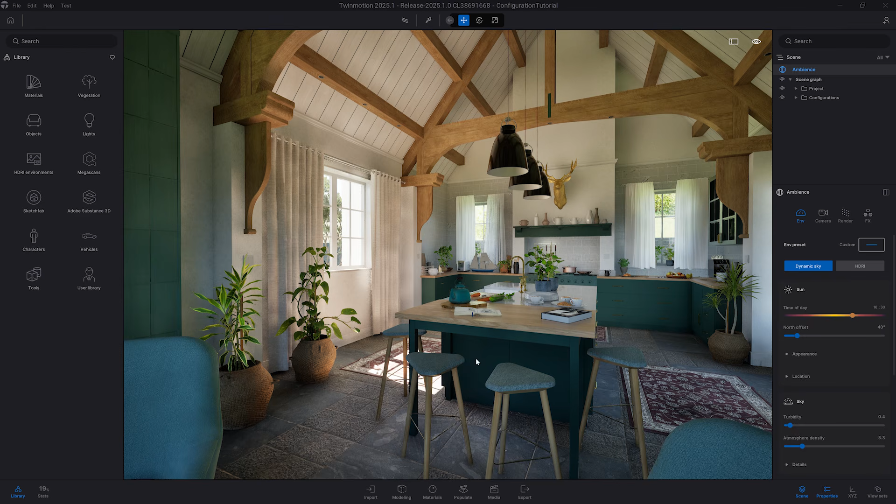This new type of media can be found by going in the media dock and heading over to the list icon in that bar. The first thing you will need to do is select the type of configuration you want to create. So I'll click on the three dot button here and it asks me what I want to create. Let's start simple and create a material switch configuration.

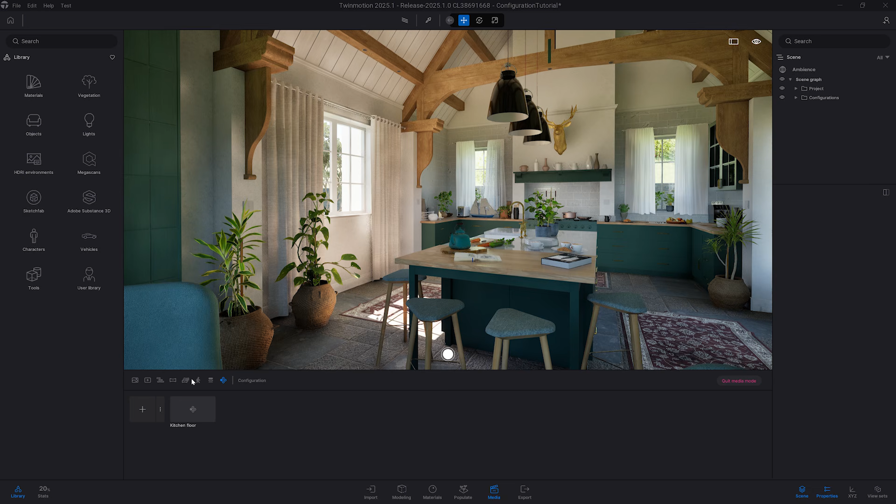I'll click on the plus to create my first configuration, which contains by default a first state. I can head back to the list of configurations by clicking on that icon, and here I can see the first configuration I've already created. I'm just going to rename that kitchen floor, because that's the first configuration I want to create with you: change the set of material applied on that kitchen flooring.

Let's select back our configuration here. Right now I have a first state that memorizes nothing. What I need to do is make a change in my scene based on the configuration I have created, and click here to create a second state.

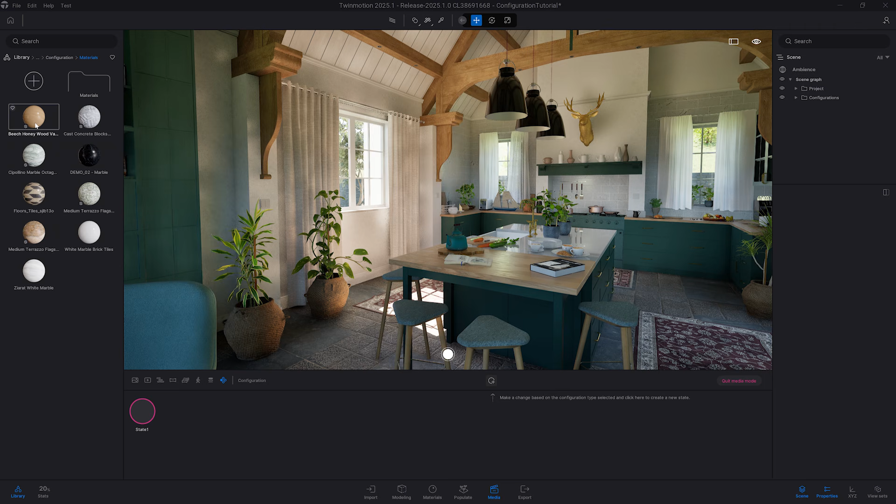So let's do that. I will head over to my user library where I've set up a few materials for this tutorial. I'm going to use this floor tile here and drag and drop that on my kitchen floor. Now what I'm going to do next is simply click on that create new state button. This will create a state number 2 that memorizes that material on that mesh in my kitchen.

So I'm going to drag and drop this one and this one. So now I have four different materials applied to my kitchen floor.

I can select them by clicking on each thumbnail, but you may have noticed that at the bottom of the viewport there is a trigger icon over here. When you click on it, it will switch from state to state. You may hear a small sound when you are hovering the trigger and when you are clicking on it.

If that disturbs you, you can go to the Preference panel by clicking Ctrl P, Appearance, and disable all sound by unchecking this option.

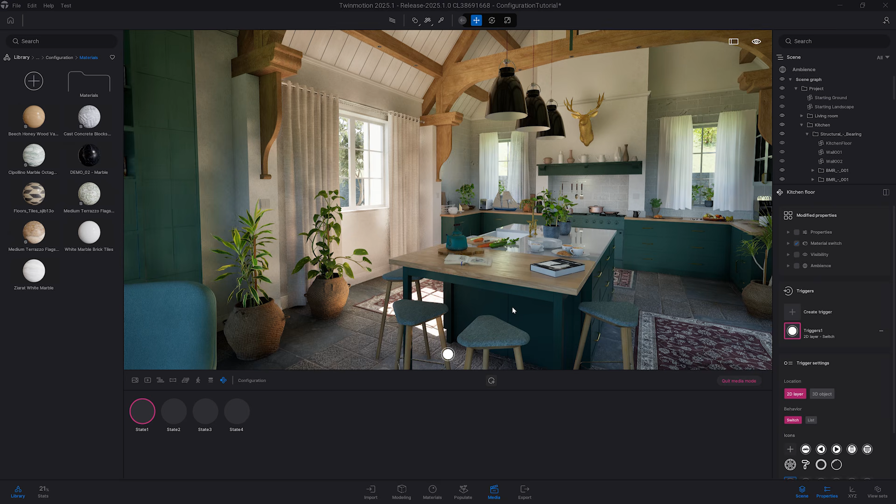So now let's head over to the Property panel of our configuration to see what we can do with our trigger. At the top here you have the list of modified properties within your configuration. So we have created a material switch configuration, and if I expand that, I can see that I've modified the material applied on the kitchen floor geometry.

Here I have the trigger. The trigger is the interactive button that will allow me to switch through the list of states I have created. And here I have all the settings related to that specific trigger.

First thing I want to change is the trigger icon. Here there are a few icons that are natively present inside Twinmotion. So let's say I want to use that color palette because we are changing the material applied to that floor. The next thing I can do here is change, for example, the opacity of the trigger, the color, or the size. I like to leave everything by default here.

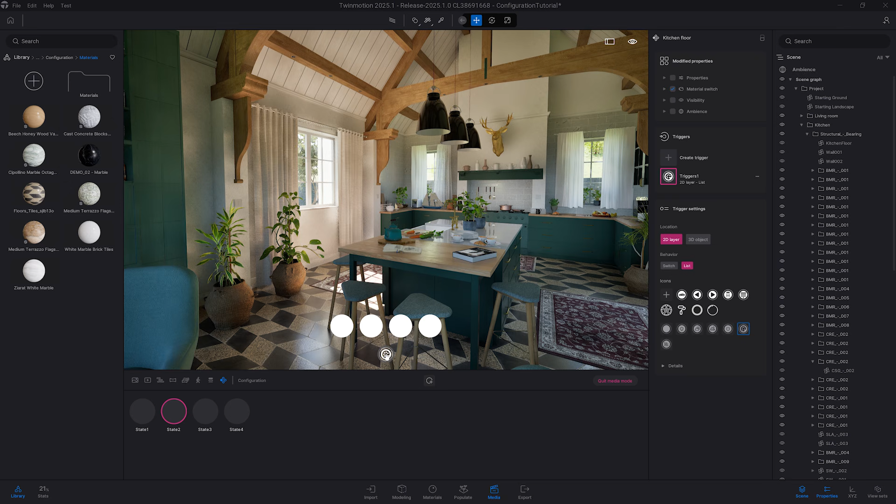What I can do now is switch to a list. That means that when I click on that button, it will open a list from where I can precisely choose the state I want to use. But right now that list is empty, it only has those white thumbnails. That's because I need to load or create my own thumbnail.

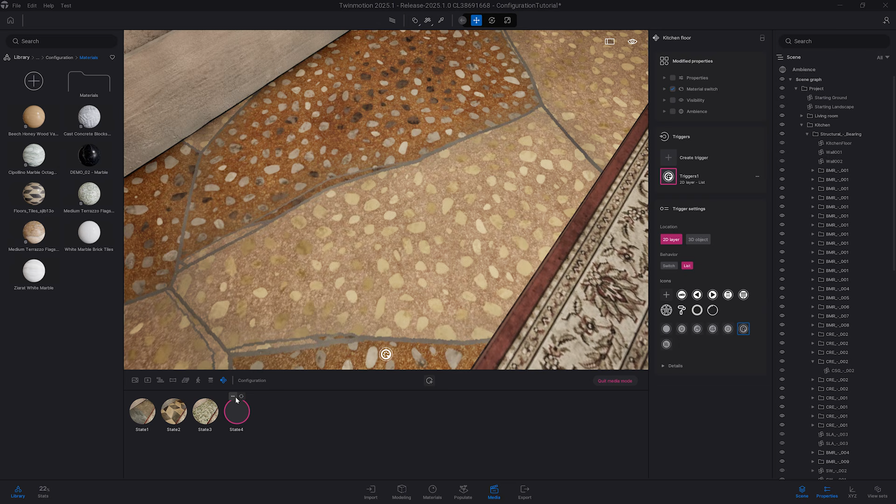So let's go over to an area where I can see my material well, like that. I will click on my first state, click on the 3 dot button, and click on Capture Thumbnail. This will capture a thumbnail directly from the viewport. I'm going to do that a couple of times for each of my states. So now I have a nice thumbnail.

Let's head back so we can see the whole scene. And now when I click on my trigger, it opens a list of thumbnails and I can precisely choose the material I want on my floor.

Bear in mind that this refresh button doesn't recapture the thumbnail automatically. It will refresh the change you are doing in the scene, and I'll talk about that in a future configuration we'll create together.

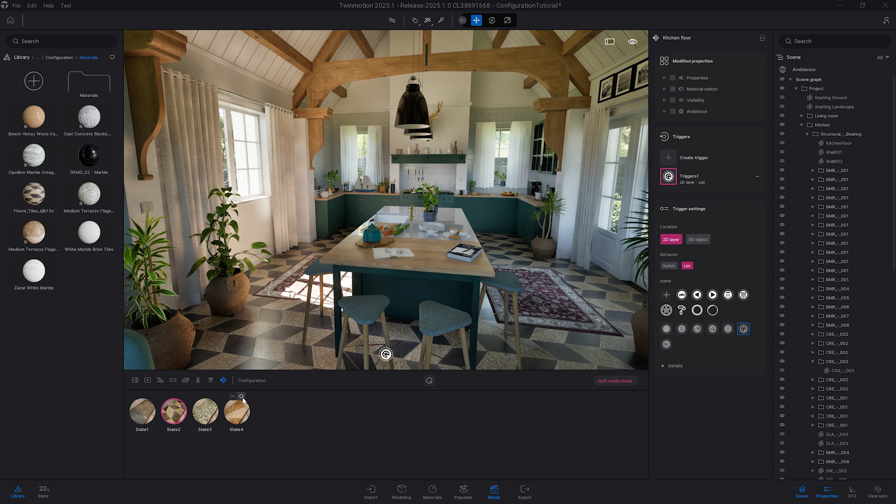So let's say we're good to go on this first configuration. Let's now create a second one. I want to create a visibility configuration. You can multi-check multiple types, but in most cases you'll create a single type. Here I want visibility, so I'll check visibility and click plus. To keep things organized, I'll rename it to stools.

Select back my configuration, here I have a few stools. Let me come to my scene graph and open my configuration folder, stool. Here I have 4 different folders, one for every stool design in my scene. So what I'll do is hide my first folder, unhide the second one, clicking on create state, and do that for all my stools.

So now I have 4 states, one for every stool. I can use this same technique to capture a thumbnail of each, but what I did instead is place those different stools in a simple lighting scenario and create some images.

Now I can use load thumbnail to load a custom image from my disk. So here are my 4 different thumbnails I've created. I'll load the first one, click on the second one, load thumbnail, third one, and fourth one. So now I have 4 different thumbnails.

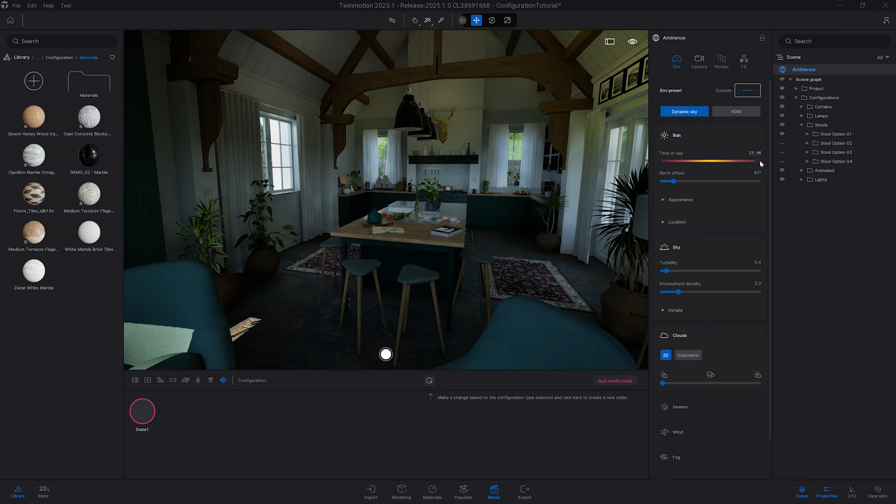That first state will be what we currently have in the scene, the daylight scene. But in a second state, I want to create just a night scene, so I'll change the time of day to something on the night, making it way darker, and click the plus button to create a new state.

So we start with state 1 during the day, state 2 during the night. If I expand this option, we can see I've only modified the time within that configuration. That list of modified properties is for your whole configuration.

Let's say I want to change something else. Maybe in that second state I want to change the north offset a bit, so we don't have the moonlight coming in that setting. I can just change that a bit.

Now I need to refresh those changes, because if I just click back on my state, it will apply that state, which just has a modification of the time of day. So as soon as I make a change, like changing turbidity, atmosphere, adding clouds, or changing the north offset, I'll need to click on the refresh button. Here I've modified a bit too much, so I'm going to click back on state 2 to get our default settings, then change just the north offset and click refresh.

So that's going to be my day and night configuration. For that I'm going to use this icon. What I want to do next is create a configuration where we can turn on and off some light in the scene.

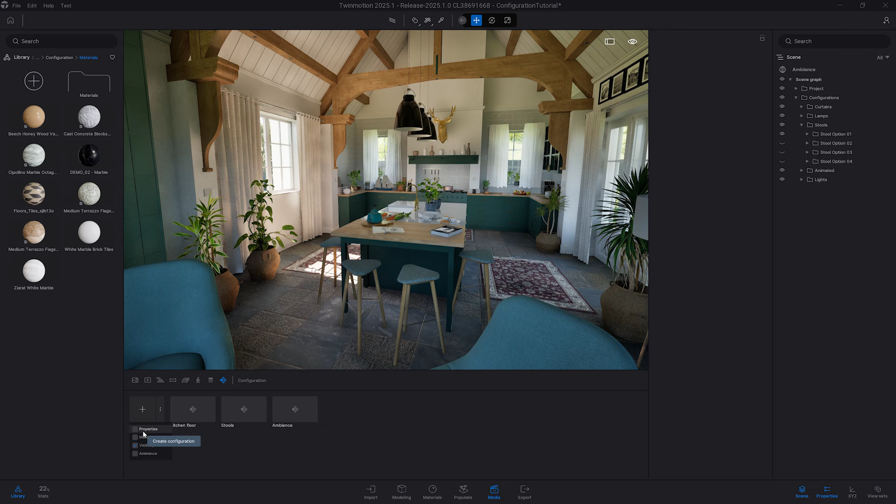So for that I'm going to play again with the visibility. It can be done in a couple of different ways, but for this first example I'll do it with a visibility configuration by clicking the plus button. Now what I want to turn on is the lights over my oven. I'm going to come to my light folder, kitchen light, and here we have a simple light that I'm going to turn on by clicking the plus button. So when I click on it, it will turn on this light.

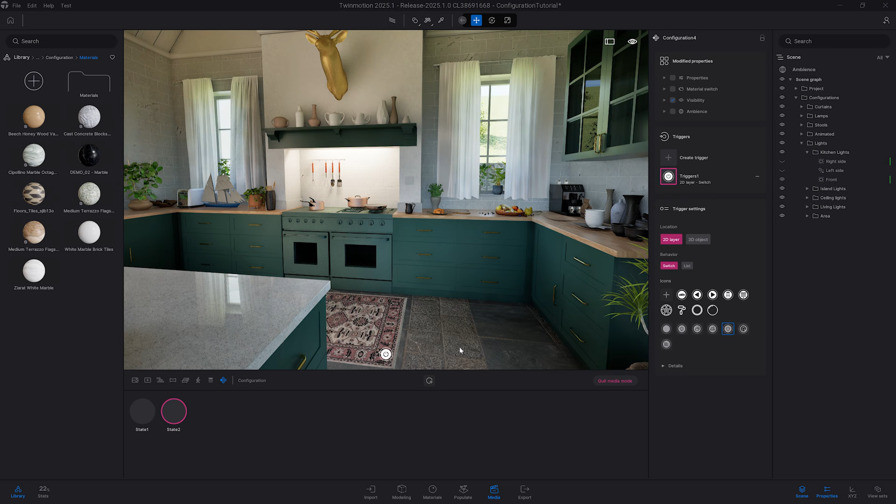For this specific light, what I want to use first is that on-off button. And now I want this icon not to be in 2D, not on the bottom of the screen — I want this icon to be in the 3D space. That's where the location option will be useful.

I'm going to click on 3D object. This will place a trigger in my scene graph that I can grab and move anywhere in my scene. To move it, I'll select it, press Shift and click on the geometry. This will align that trigger on the geometry I've placed my mouse against.

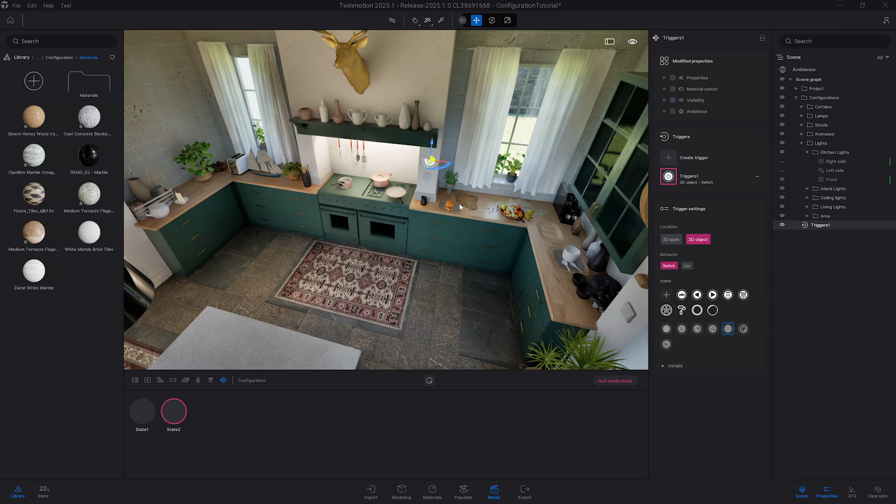But you can also simply move closer to it and use the gizmo to move it exactly where you want. In that scene I've placed a light switch next to where I wanted that light to be enabled, so I'm going to place the trigger just in front of that light.

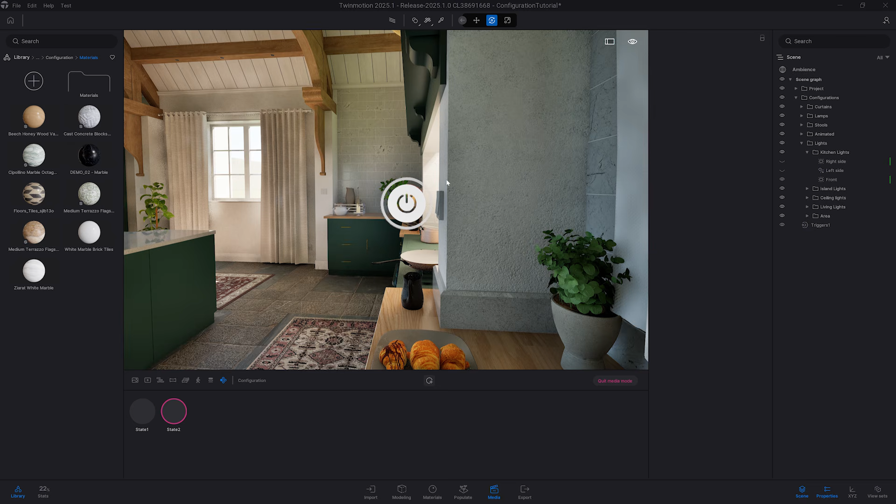By default, the 3D triggers are always facing the camera. So as you can see here, when I turn, it will face the camera. And in a lot of scenarios that works well. Personally, what I want in this specific scenario is to have that trigger always in a fixed position in the world.

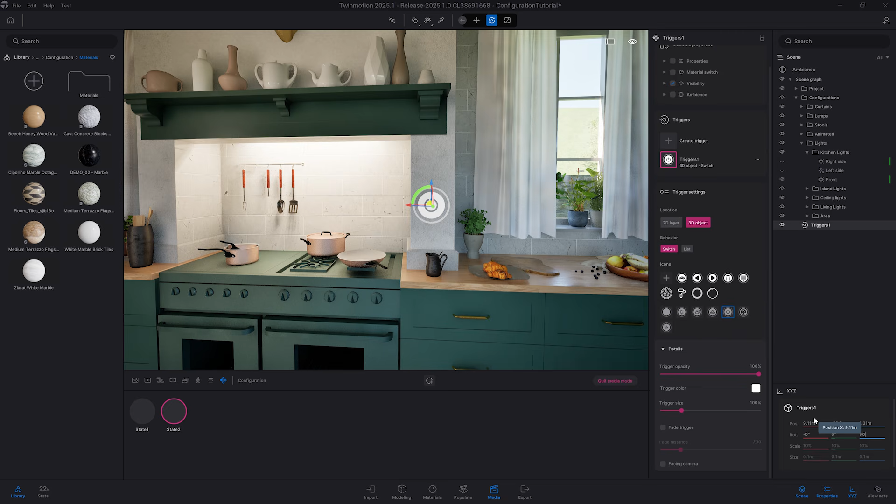So I'm going to come to the Details panel and uncheck the Facing Camera option. I'll select my trigger back, and when I open the XYZ option, I can precisely orient that trigger. Typically, I want to reset the rotation it has to 0, 0 and 90, so it's no longer facing myself, it's just aligned with the wall here.

And now I can also move it closer to that light switch. So now you may notice we don't see the light switch anymore, but we have something for that — what we call the fade trigger. When you check that option, the trigger will disappear and fade in as the mouse gets closer to it. So when my mouse gets closer to my trigger, it will appear and allow me to click on it to turn the light on and off.

When you are experienced and know your presentation well, you can actually make that trigger at 0% visibility, which will allow you to click and just turn on your light, switching from state 1 to state 2, without having any trigger visible on the scene. That gives you a very realistic scene without any visual helpers, but of course you need to be very precise and know well your presentation and where you've placed your different triggers.

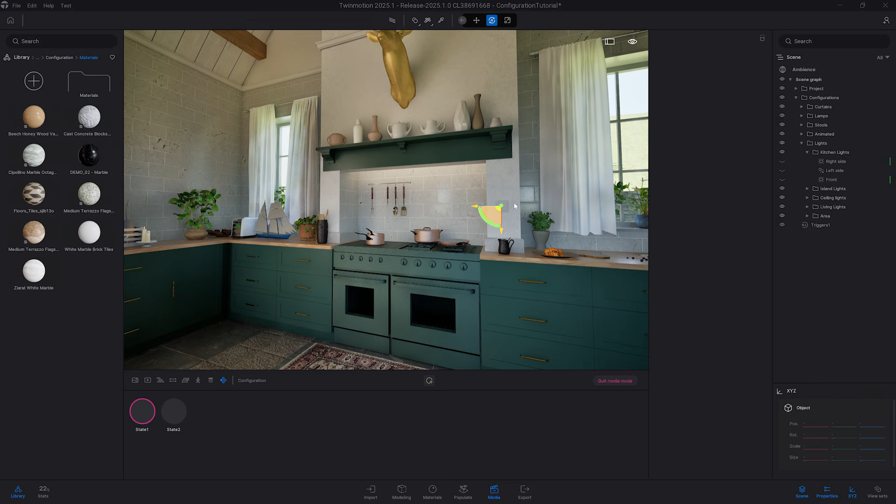When you are within the Twinmotion editor, where you have the toolbar and the dock everywhere, clicking on it will automatically select that trigger so you can move it around. But of course, when you are in full screen mode, clicking on it won't select the trigger — you'll just click on it and activate the different states.

Let's come back and review some of the things we just did. We configured materials, we did our stool design, and this one will switch to night mode.

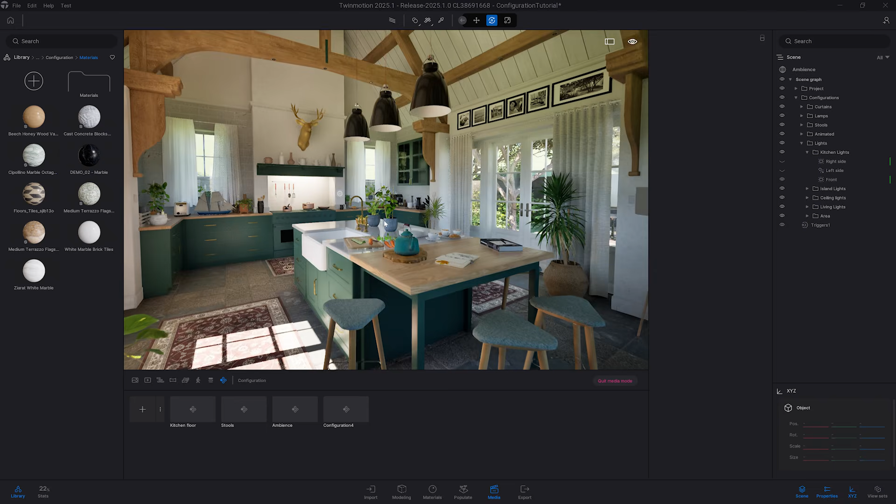Now we can turn on the lights. Let's exit that, and I'll create a new material switch configuration to show you how to fix an issue if you have a problem with your file.

I'm going to create a material switch, and what I want to change is the wooden countertop. I want to have a simple marble on my second state. So state 1 is wood, state 2 is marble.

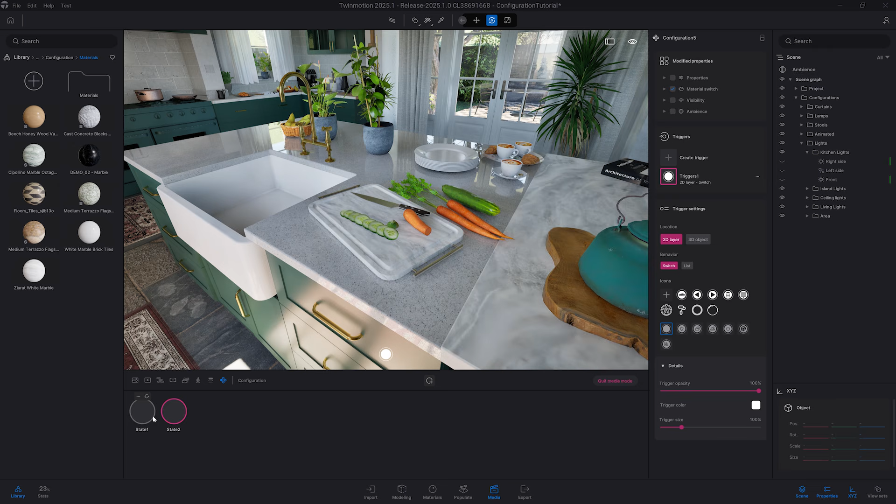The problem you may have noticed is that my cutting board had that same material. When I drag and drop a material from my library onto my mesh, it overrides all the previous mesh. The wood has been overridden by that new marble, and typically I don't want that on my cutting board.

To fix that, I'll come to my list of modified properties. Here I have my cutting board, which should stay in wood. So I simply need to remove the cutting board from my configuration by clicking on the bin icon. Now the cutting board is back to its default wooden material, while the other mesh still have that marble material on them.

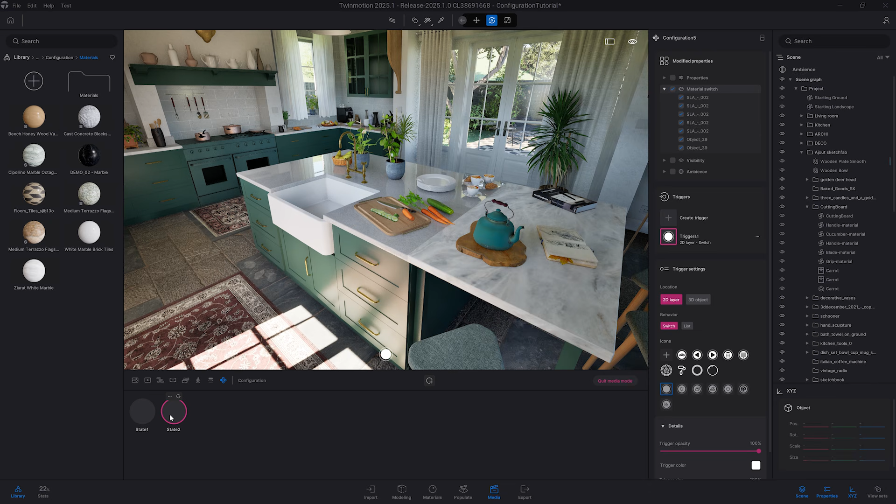So now I can safely switch from state 1 to state 2 and the cutting board is not affected.

The last type of configuration is the most versatile one: the configuration of properties. What we call properties is all the property panels in Twinmotion except the ambience. If you select ambience and want to change anything there, you need a configuration of ambience. But any other property panel can be tracked with the property type of configuration.

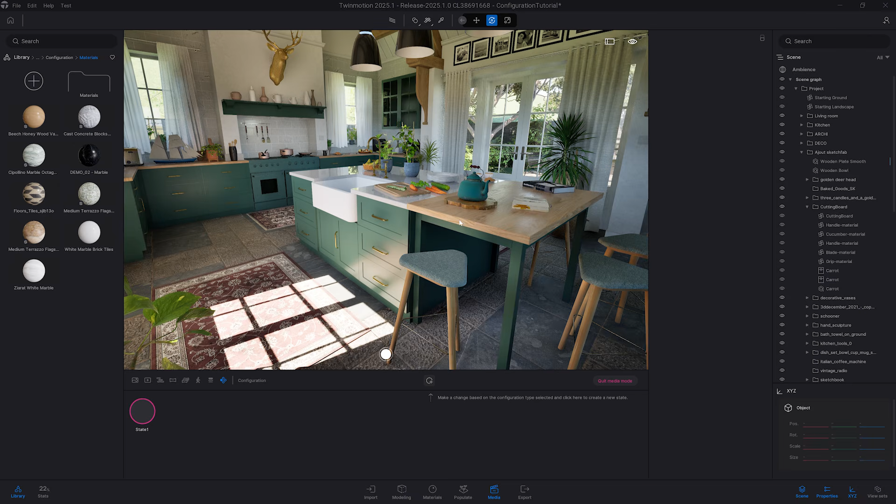Let's create a new configuration. I'm going to name it furniture, and what I want to change is simply the color of my furniture. The first state will be that green color.

Now I'm going to select my material picker, click on the furniture, and all the options in that property panel can be tracked in a configuration. I'm going to change the color to white, click OK, click plus to create a new state, and now I can switch from state 1 to state 2.

Let's create a third one. Selecting my material picker again, I'm going to create a dark, almost black color, then click plus. So here we just changed one material.

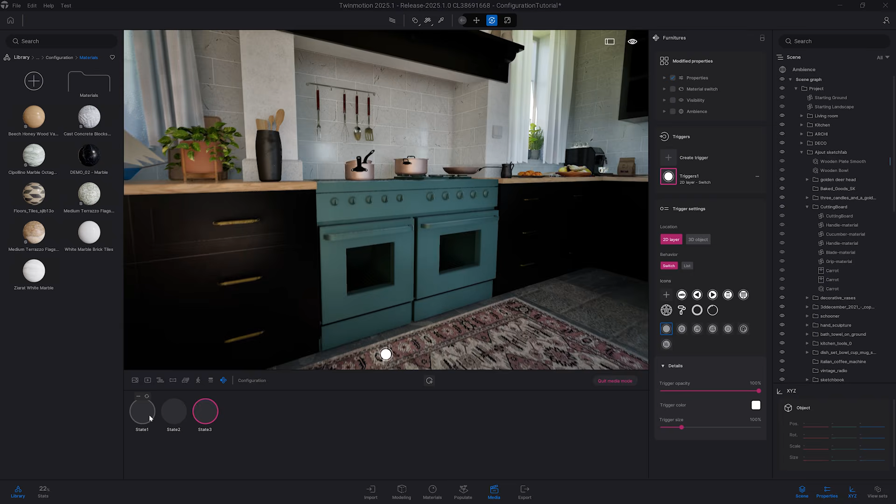What I want to change is also the oven. State 1 will remain green, that's fine. For state 2, I'll pick my material picker, select that material, and switch it to something gray. I'll click refresh to memorize that change on that existing state.

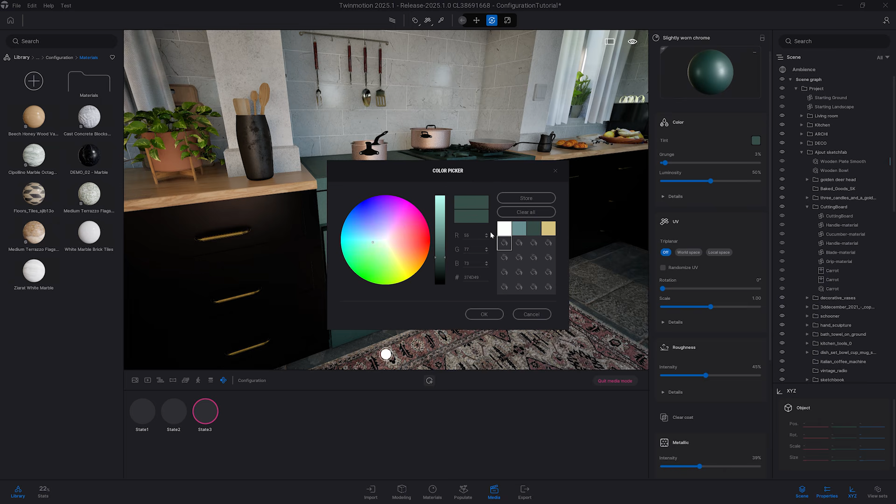Same thing on state 3 - by default it's green, so I'll select that and switch to a darker color, then press refresh. Now I've created a configuration of property where I changed only the color of two materials.

Another example of property configuration is for animators. Let's create a new configuration of properties. I'll press G on my keyboard to show all the visual helpers, then select my animator. I'll click play to play it, then click plus - this memorizes that in state 2 the play is on, while in state 1 the play is off. Now I can simply open my drawer like that.

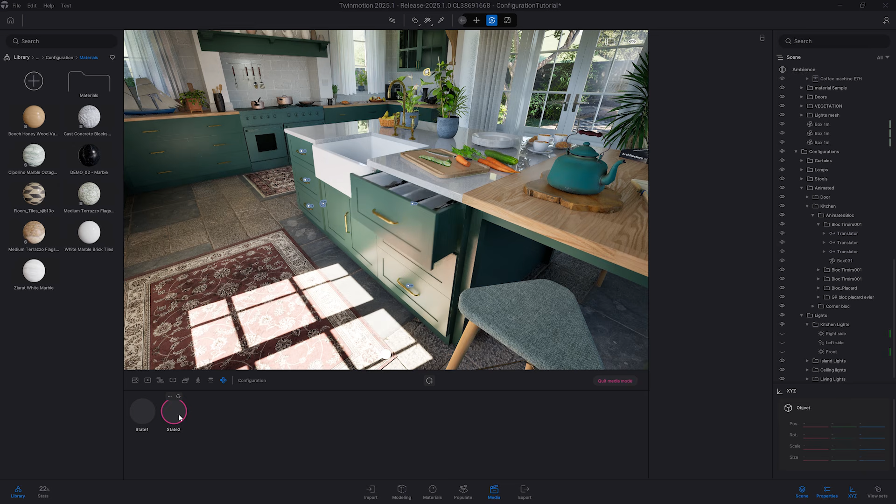Same as what we did before, I can switch to a 3D object, I can align it over the handle, and make it not facing the camera if I want. But what I want to show you lastly on this configuration, let me collapse my scene graph so we can better see what we are doing. So, facing camera off, I'll select my trigger and make it not facing the camera anymore.

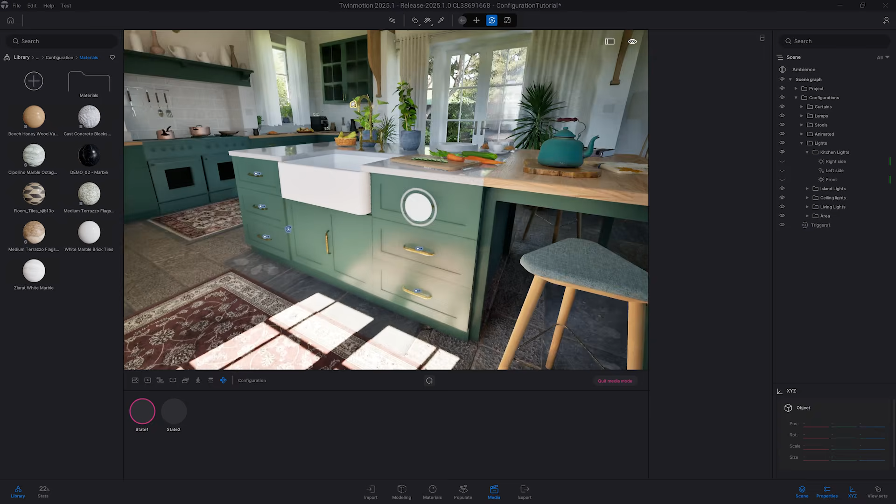What I want to do is link that trigger to the drawer, because right now if I click on it, the trigger remains in place. Let's first localize our animator, which is over here. Now I simply need to select my trigger and move it as a child of my animator, so when the animation launches, the trigger will be animated in the same way.

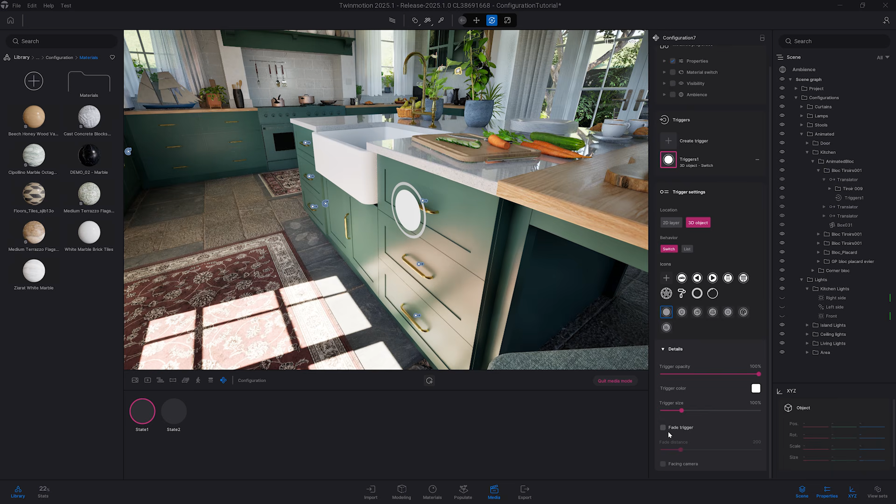So that's about it on how you can create your configuration, but now let's check how you can use them.

The first way to use your configuration is by simply clicking on media mode here, and you will see all the configurations you have created. But you are not limited to that.

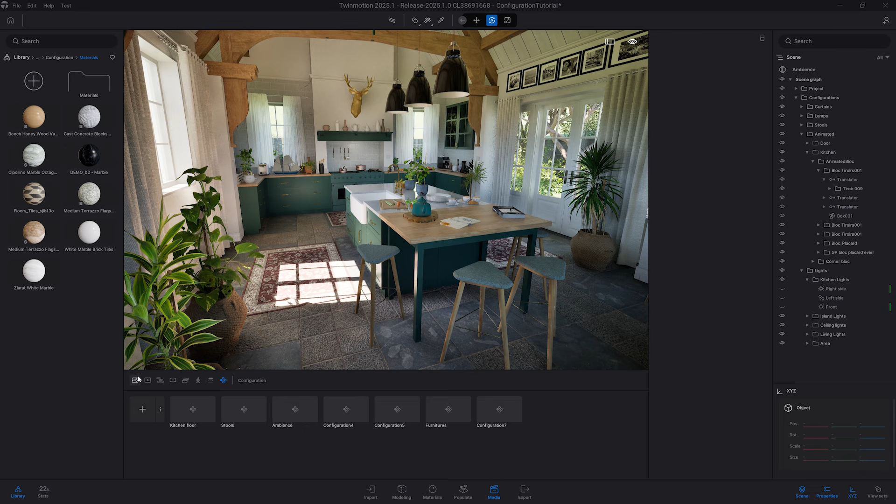Let's head over to the image. I'll select an image I have already created. Now what you can do is head over to the image tab. At the bottom you will have the configuration, and here you will have the list of all the configurations you have created. That's where naming your configuration properly becomes very important.

Here I've left everything named state 1, state 2, so it'll be a bit hard to sort what is what, but at least I have the name of the configuration itself. So for example here I have the kitchen floor at the top.

In that specific image I can choose which material I want to apply on my floor. So I can choose, for example, the second material. And I know the last configuration we did was the furniture, so if I want my white furniture, I know it will be state 2 here.

When I make those changes, it's automatically refreshed in the thumbnail, and I can export this image with that selection of configuration. This works also in video, sequence, and panorama.

With a limitation in video and sequence where you can't apply a configuration of ambience or visibility, but this is something we'll work on in the future.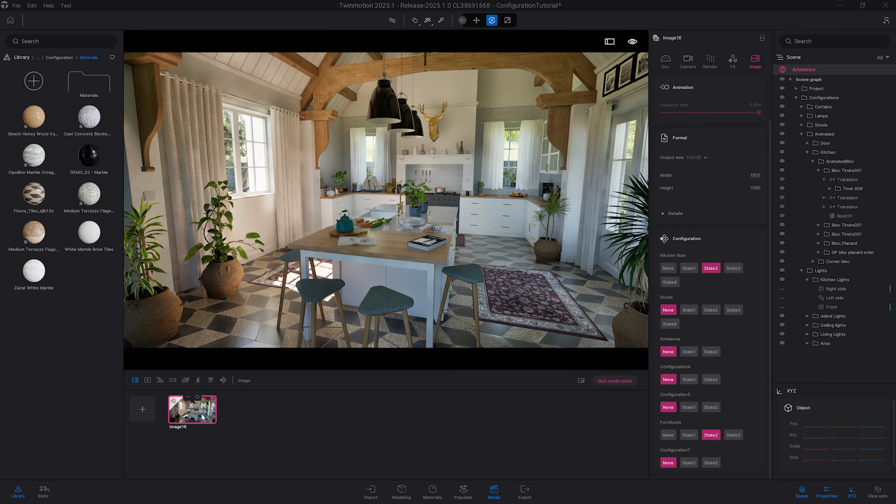Let's now create a presentation together. So I'm going to head over to the presentation, click on the plus. Here I will load a first image.

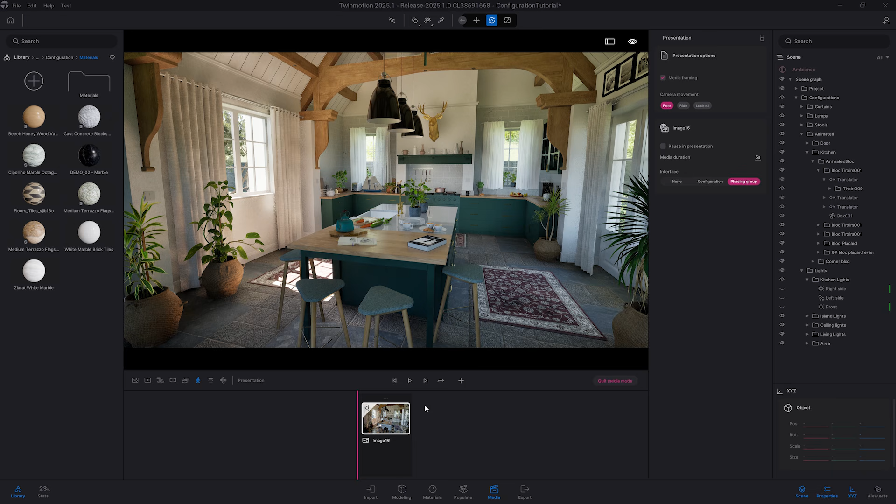What you may notice is that on the right here, you can choose what type of interface element will be present in that specific media inside your presentation. By default, the phasing group will be present inside that image, but you can choose to enable the configuration. When you check that, by default all the configuration will become available in that media.

But you may choose to disable some configuration. For example, maybe when you plan your presentation to a client or coworker, you don't want them in that point of view to be able to change the time of day. So we can hide the configuration of ambience, and hide all the others if we want, and just focus on the material of the floor and the stool.

And then later on we can add another image where we could just focus on opening the drawer and playing with the furniture color.

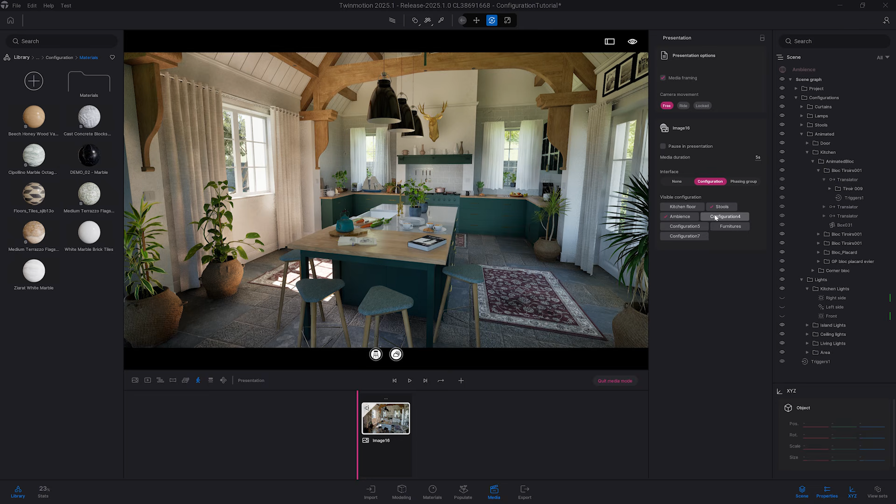And of course, when you switch to full screen mode, once you have selected the list of media, per media you can have different types of configuration available.